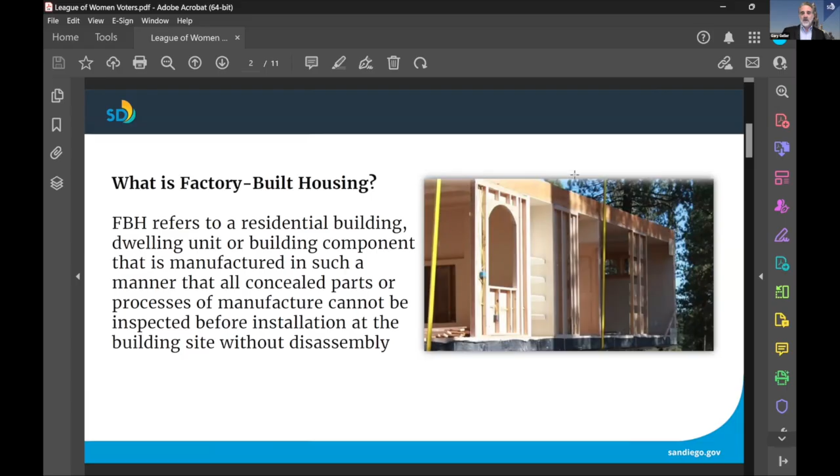What is factory-built housing? Factory-built housing is a residential building, a dwelling unit, or a building component that is manufactured off-site, such that the parts or the processes during the manufacture are not inspected at the site when they're constructed, but off-site prior to delivery to the site. What is not factory-built housing? A common misconception is that mobile or manufactured homes and commercial modular structures are factory-built housing. These are not considered factory-built housing. These have different requirements under state and federal law.

What role does the Development Services Department play in the factory-built housing environment? We coordinate with the state on projects that are submitted at the local level to the City of San Diego to review the plans. There are certain things that we can review and we cannot review. Those things that are done at the plant in terms of factory-built manufactured housing, there are certain components that we would not review nor inspect once it's on site.

So our scope is limited in reviewing plans to site-specific requirements such as the zoning. How many units can be built on this site? Are they utilizing affordable housing density bonus or complete communities or other types of housing programs at the local level? We can look at geology for the soils conditions of the site, fire, accessibility, and local amendments to the building code that are not adopted at the state level.

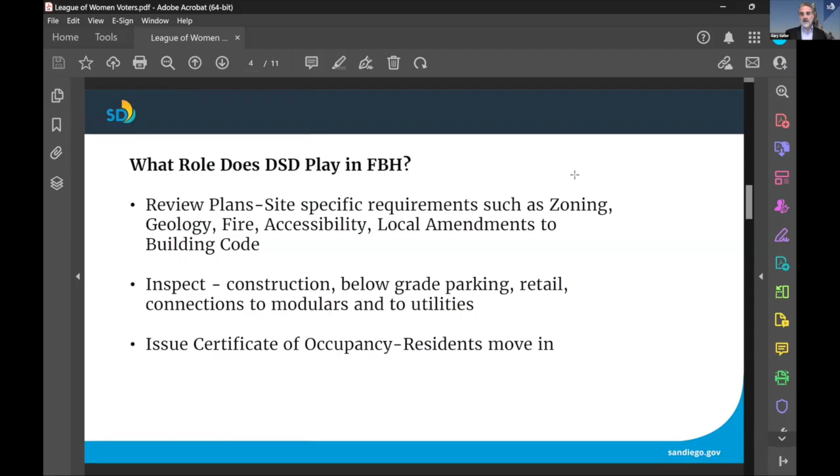We also inspect the construction, those components that are not factory built, below grade parking, any retail or commercial that is part of that development. We have seen a lot of mixed use factory-built housing that incorporates perhaps a coffee shop or a restaurant or a community room with the factory-built housing. We also inspect those connections to utilities on the site. And finally, our building inspectors issue the certificate of occupancy, and that's the point in which residents can actually move in and live in the factory-built housing.

What we found at the local level is that we've had successful implementation because we've worked with industry groups. Some of the gentlemen are here with me today, and others, in identifying what are those rules at the state level, what are those rules at the local level, and how we can better coordinate and streamline the review process. The idea of factory-built housing is it's cheaper to build and it's faster to deploy. So if we can remove time out of the equation, these units can get to market faster.

We had two successful rounds of a stakeholder group where we discussed ideas on our plan check comments. When a structural reviewer identifies an issue, how does the architect respond to that? We look at when it's under construction, what if there needs to be a change during construction? What if there's damage to that unit that's brought to the site? How do we coordinate with engineering and right of way, things that are done outside of the property line, connections to those utilities, that sort of thing, to streamline and fast track the approval and construction of these.

And then we discussed the affordable housing programs that the City of San Diego has and how this factory-built housing model can fit into those just like any other type of housing. And then finally, we discussed inspections because that is a key component of this in terms of our inspectors to understand what they should be looking at on the site to final these projects.

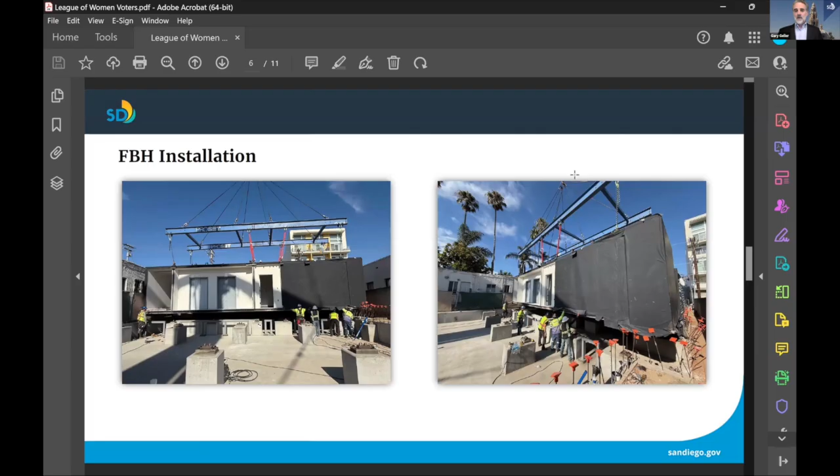These are some pictures of some factory-built housing installations around the City of San Diego. As you can see, they're craned onto the site. And what we noticed is these go fast, they move fast. So impacts to surrounding neighborhoods and communities are often less than typical construction because these can be done in a couple months or perhaps a weekend, depending on the size and number of units on a site.

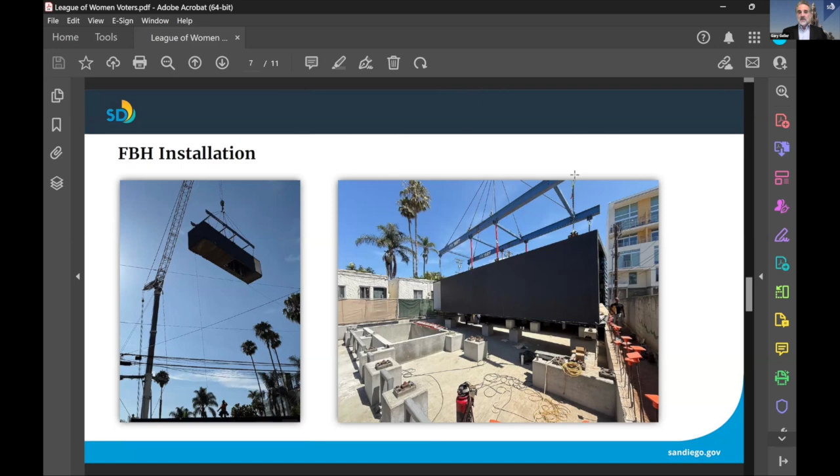So understanding that, we had to learn about, well, traffic control permits are also required because if you're putting a crane on a site, you might have to have no parking signs, you might have to have one-way traffic. There could be potentially impacts during the craning in of these structures onto the site. So that's another issue that we addressed with industry to see how we could better streamline that traffic control permit, because they have a timeline of we're bringing the crane on, we're moving the houses on, so we have to sync up our traffic control permits with their construction schedule.

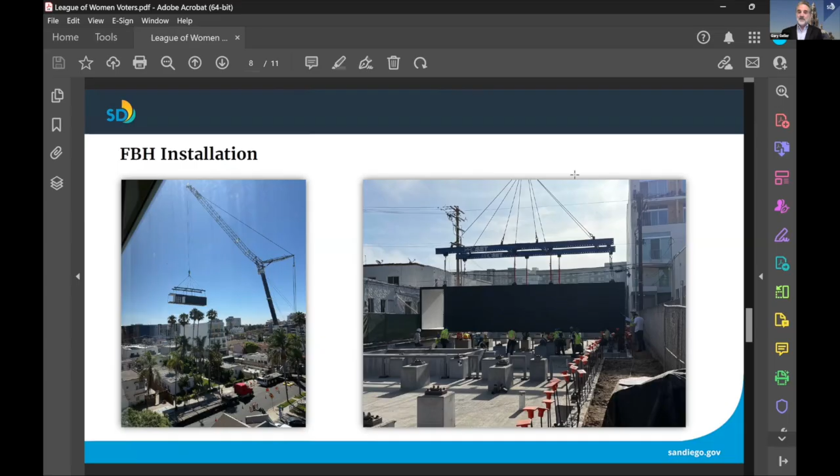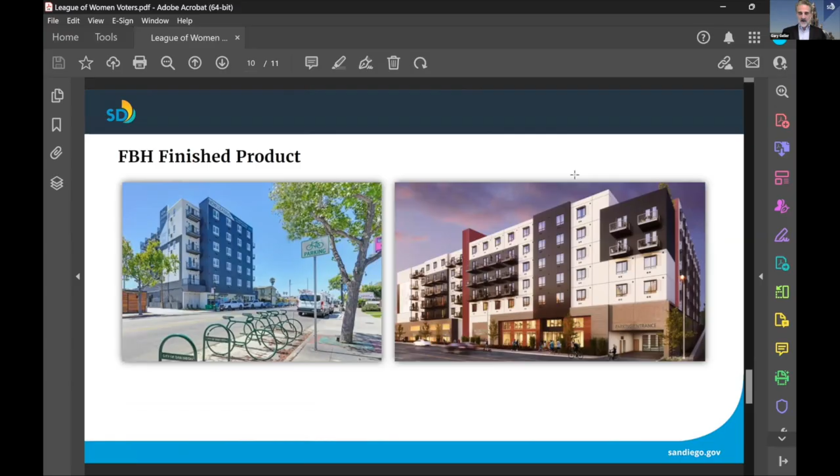Here's some other units that have been installed. And these are the finished products. And the gentlemen on the panel will also talk about some of the specific projects they've had in the City of San Diego. What's great about this is it's throughout the City of San Diego. As you can see here, there's over a dozen projects within San Diego, and these are all on infill sites. So some of them are smaller sites that can handle maybe 40 units, and they're taking advantage of the affordable housing and complete communities programs that I identified. And it's been a successful implementation so far, and I'll pass it over to Matt to talk about some of his projects.

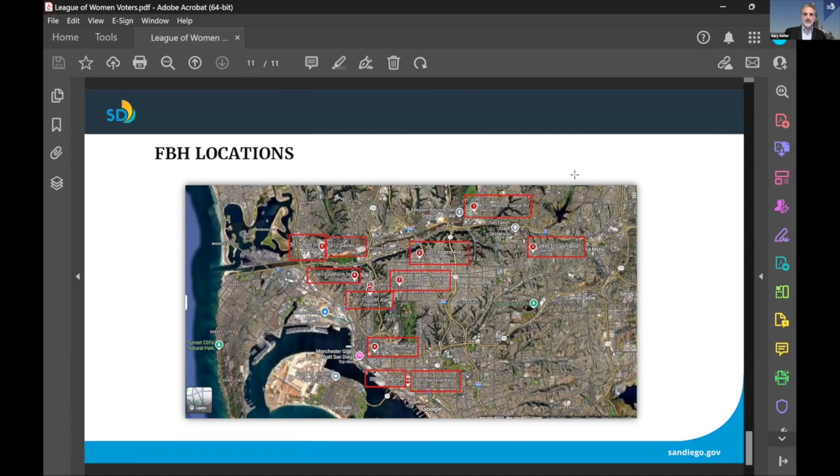Okay, let me share here. Let me get the slideshow going.

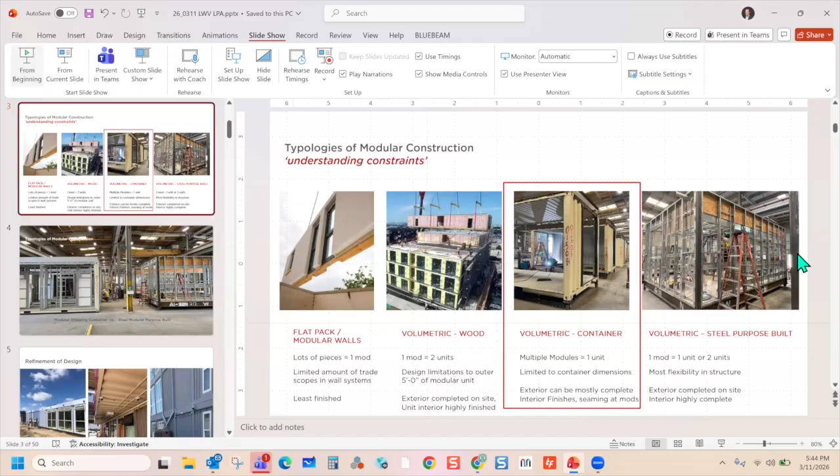Excuse me, Matt, can you share your slides again? They're not showing. Oh, okay. Let me try this again. Now we're seeing your desktop. Now we've got it, this is your title slide. Thanks, guys. Sorry for the interruption. No, I appreciate it. I only have one screen, so I have to put it all on one screen. Let me get this off to the side as far as possible. How about that? Okay.

So basically, these are the four typologies that I was talking about: flat pack modular, volumetric wood, volumetric container, and what we're now starting to call volumetric steel purpose built. One of the reasons the industry is going towards volumetric steel purpose built or volumetric wood, as opposed to volumetric container, is because with the containers, while there's this really great idea that you're reusing recycled material that's sitting out in the desert rusting away and putting it to good use, you end up taking them apart and having to put them back together. So the industry is moving a little bit further away from that.

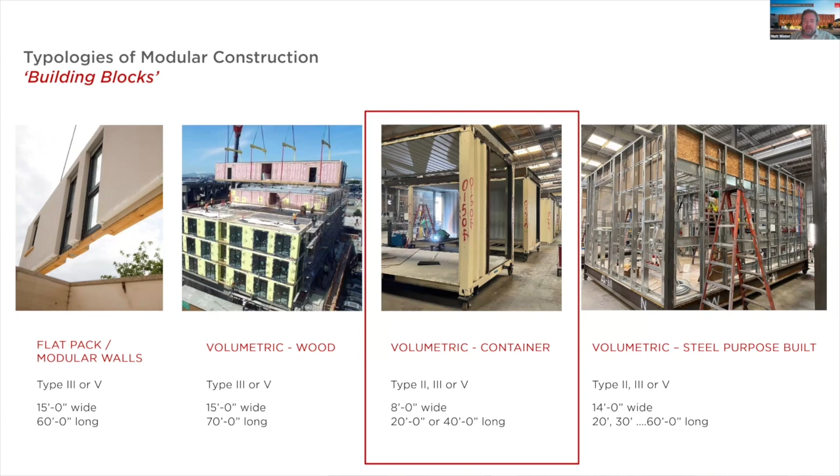But once again, the volumetric modular on the right, you can purpose build it, meaning you're not constrained by the 8 by 20 module of the shipping containers. When we first got into these projects, we looked at some existing projects and noted that they were very, very messy. People weren't very thoughtful about how they put them together, and they slapped on a lot of extra conduit and lighting and all kinds of stuff. So we worked very, very hard, and you'll see later, to clean that up as best as possible.

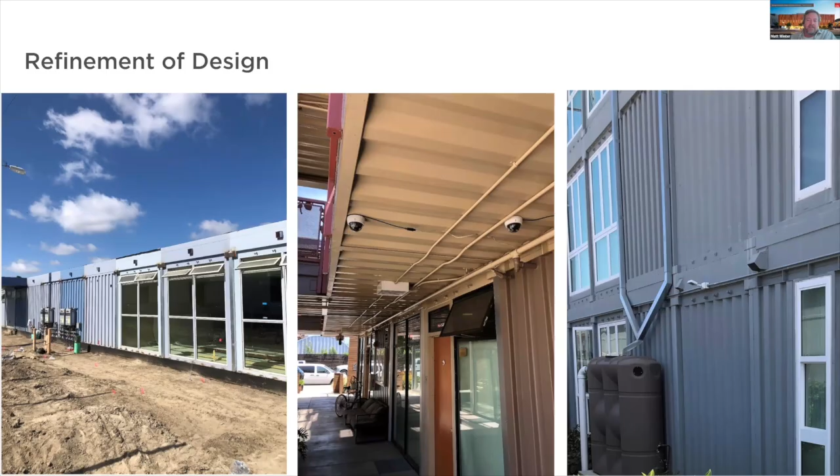And I think it's important, as this industry is maturing, that's really thought through and carefully organized. A couple interesting things about modular construction.

One of the things you'll hear about why this is important is, if you're looking at the schedule here, on a lot of projects you can do the site work while the modular project is being constructed off-site. You can see this long green line of 24 months of construction, and you're actually sort of cutting it in half and then stacking it, making it concurrent. So in this case, on the project we're going to share here in a minute, we were able to manufacture all that stuff while we were building the podium for the project.

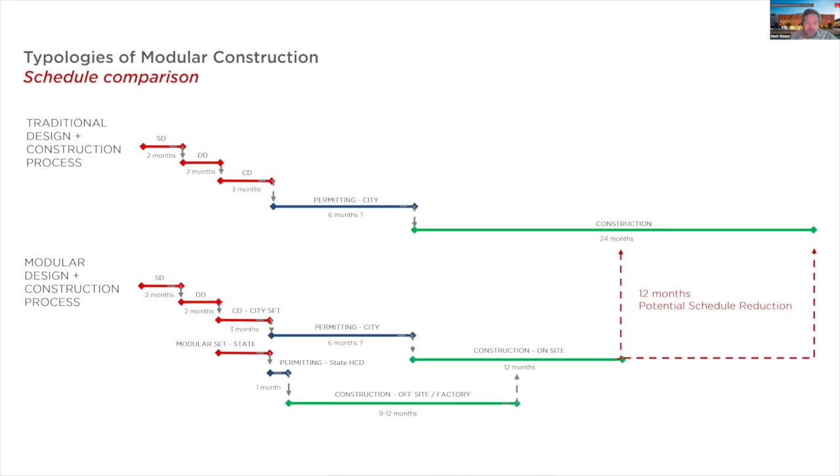Another important aspect for modular construction is that a normal bank draw for any kind of construction project is typically like 10%, 10%, 10%, 10% as you work your way through the project and you're buying more materials and getting more completed. So banks aren't used to the modular offsite factory cost where you have to buy all the materials in one shot. And so you're asking for more money earlier. So it's a little bit of a different setup.

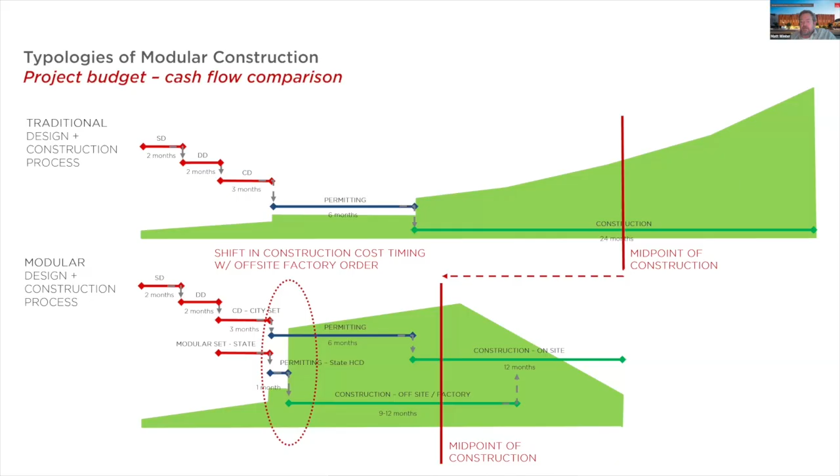However, some banks are becoming more comfortable with it, and some people are more vertically integrated and able to handle that way of working. But it is a different sort of financial outlay. Other things that are important to understand while you're thinking about modular construction projects is location, in relationship to the factory. Part of the conversation when you're looking at different modular manufacturers is transportation costs. Scale of the project is really important.

Being able to understand if the scale makes the most sense, understand the program. You can't have a lot of complexity in any of your projects. It's got to be relatively straightforward and simple. Stack. That's why residential is a really good use for modular. Hotels is another one. Whether or not prevailing wage is a part of your project is potentially a factor in whether it makes sense to go modular or not. And then understand the local construction market and its costs.

So the design process. This is the project we're sharing here, and it's with Family Health Centers of San Diego. They're one of the largest nonprofit healthcare providers in the country, and the largest in San Diego County. They have maybe about 50 health clinics in San Diego County. However, they've recently become very aware of how important housing is to health, and how they're just intimately connected.

And so they had a site where they had an opportunity, on El Cajon Boulevard, where they could put housing on one of their clinic sites. And so they decided to go all in on this project that I'm about to share, which was housing on top of their clinic, on top of parking, and also go modular. So they kind of jumped off a double diamond slope on their first housing project, but I think it was really successful.

To talk a little bit about the design on this project, the community plan actually calls for a bit of a street wall on El Cajon Boulevard, but this particular site doesn't have a height limit. They just updated their community plan for higher density in this region. But we were still trying, as best we could, to be sensitive to the multifamily and single family on the north. And so we broke up the building on the north side to really break up that massing. So when you're looking up at it from the backside, it's smaller chunks, while the community plan asked for more of a solid street wall on one side. We also did that to increase airflow, create more public realm spaces and create better lighting throughout the project.

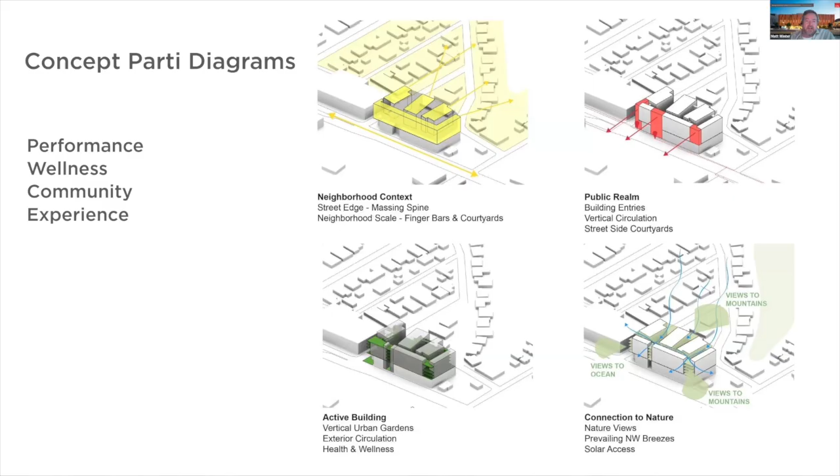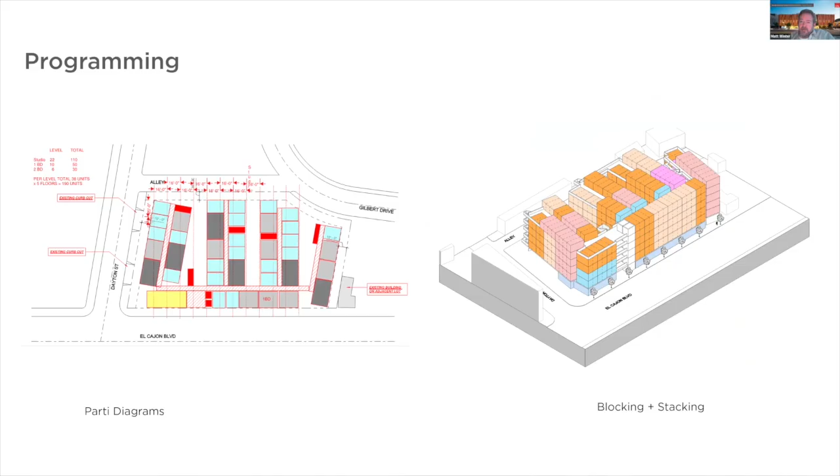From a programming standpoint, we had all these building blocks, basically. And one thing about modular is it does give you some very strong constraints to organize your building. In fact, it was really helpful in this process, and I'll get to why in a little bit. So at first we had to understand the massing, and then we had to flow in the actual container pieces.

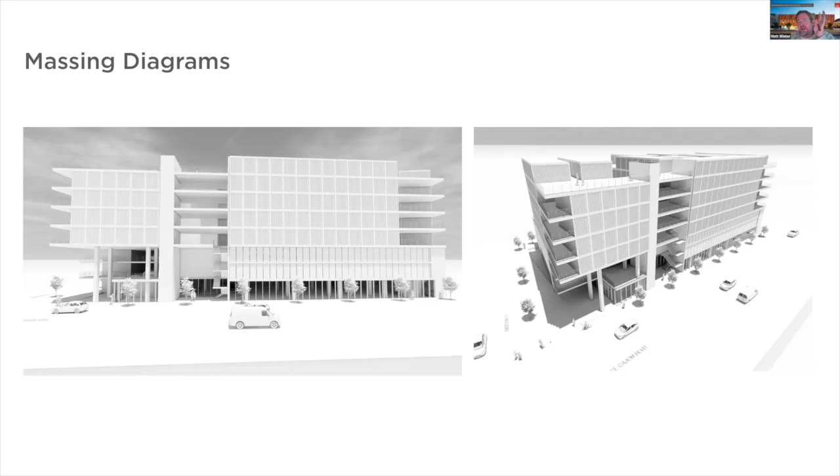As you can kind of see, those are containers stacking on top of basically a ground level clinic and 2 levels of parking above it. But you can kind of see how even with the street wall requirements, we tried to break up the facade as best we could so we can allow more airflow to go into the building.

Here it is with now window patterning. Housing is more about patterning and texture than most buildings, just because of the repetition of the program. And here's the final rendering of it. Currently, so here's the project itself being laid out.

And as Gary said, it goes really fast. We are able to do a floor a week. We drop the entire floor in a day. And then we'd spend about a week sort of connecting things up and getting it ready for the next drop the next week. So when the time came, it was just in time delivery right out of the factory, dropping 1 floor per week. There's still work afterwards, but the actual putting together the building went really, really quick.

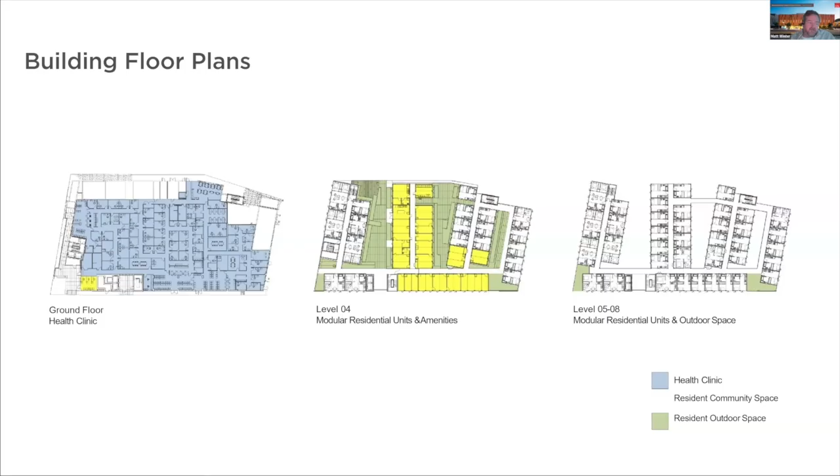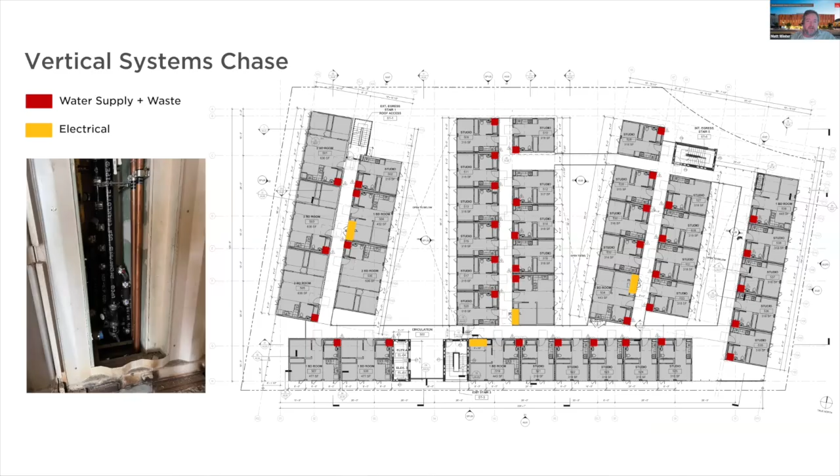Vertical systems are very important to understand and organize throughout a site. It's critical that you understand how that flows, and in this case, flows into the garage and flows up to the roof. So understanding the particular secret sauce of any particular modular manufacturer is kind of critical in organizing your building. Same thing with any horizontal systems.

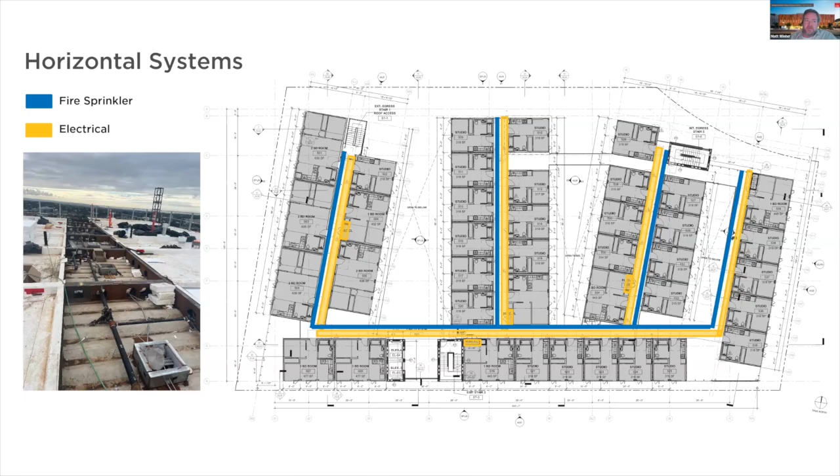This one is a little atypical of most modular projects because most of them go straight up to the roof with all their mechanical and electrical. In this case, we were grouping them around a shared system specifically because we're trying to get to net zero and we're using a very highly efficient energy system with grouped up mechanical systems. So it's a little bit different. So we had to really track how that chased through the hallways.

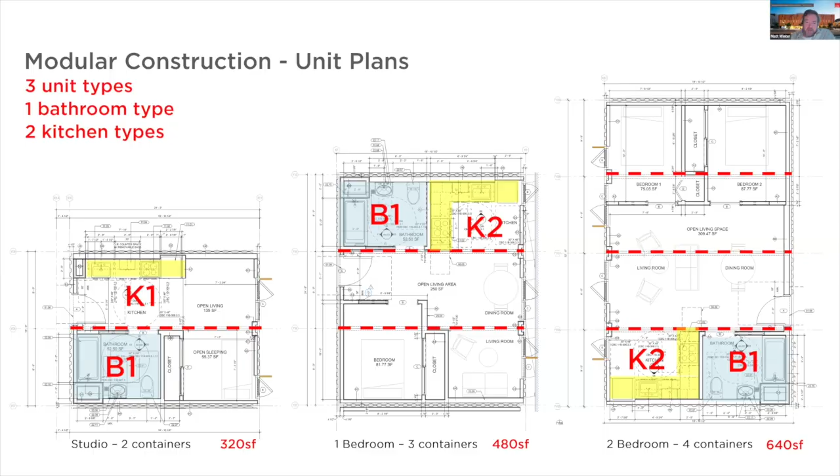Here are the modular construction unit plans. You can see very, very simple. For the entire project of 172 units, we had one bathroom type and only two kitchen types between our studio, our one bedroom, and our two bedroom units. And you can very clearly see it's 2 containers, 3 containers, 4 containers. So real small units here, you can kind of see them seam up together.

Now, it was really important for us to think about high performance design. It was one of the programmatic requirements from the ownership. So we needed to make sure that all the water, electrical, and mechanical systems were integrated in the building. Right now, we're tracking at 86.6 energy reduction from baseline, so we're really close to net zero on this one, which is really hard to do on a tall building. So we're really proud of that.

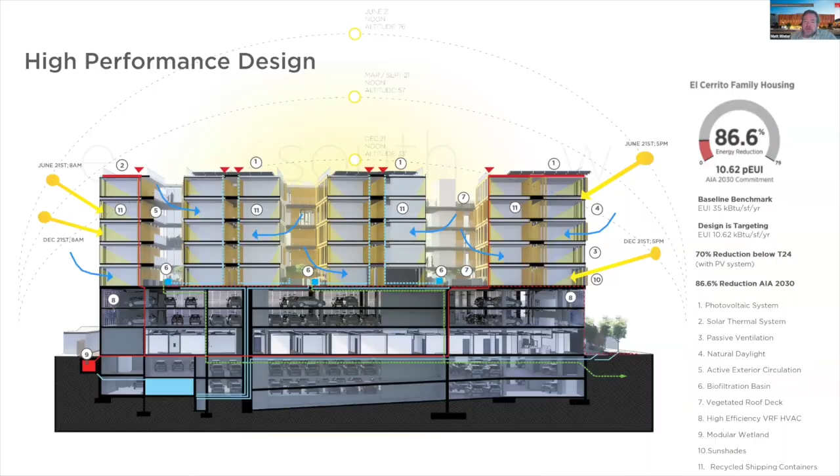Now, when you have these smaller units, it's really important to do the best you can with light and windows. This is the same amount of glass, percentage wise, as a typical residential multifamily project, but we made it a little skinnier and a little taller and grouped it up in certain areas a little more. As you can kind of see, it lets the light flow across the ceiling and the floor a lot better as opposed to a punch window in a room. So that was really important.

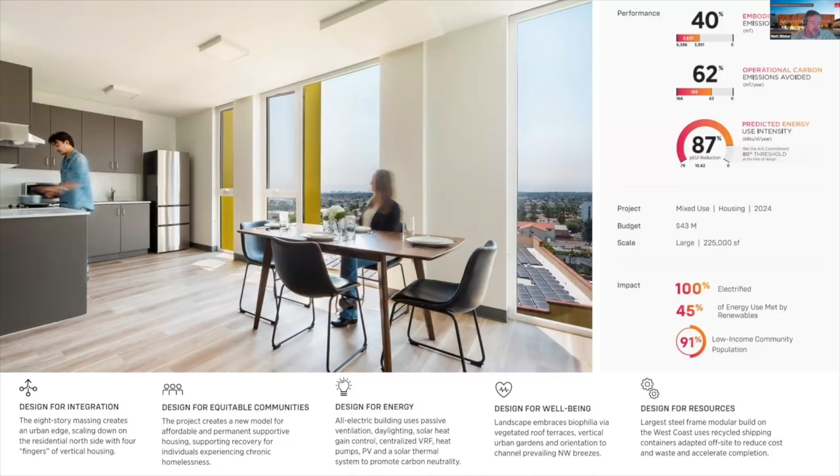Modular permitting process, just a couple more slides with this, and then I'll just zip through the pictures. As Gary was alluding to earlier, there's a state review of the modular stuff, and then a local review of all the stuff that's local. In this case, we had a huge podium, vertical stairs, things like that. There are modular projects that have modular stairs and modular elevators. In this case, it wasn't part of our program.

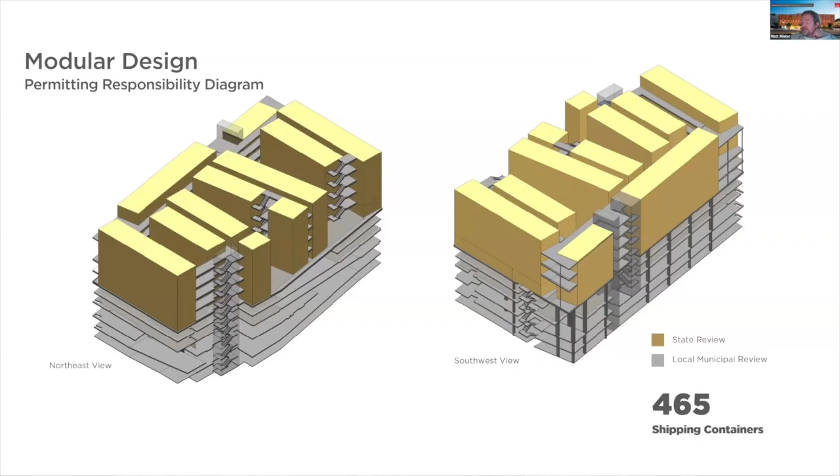This is 465 shipping containers. And as you can kind of see, here's this little elevation. You know, the city is still the grantor of occupancy.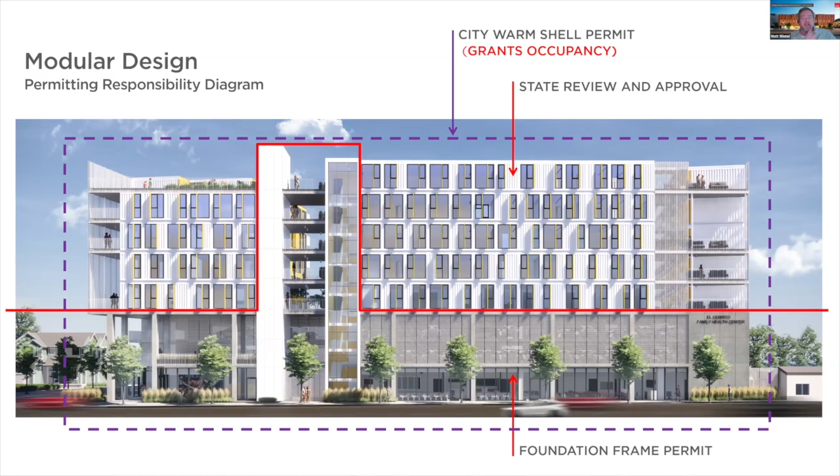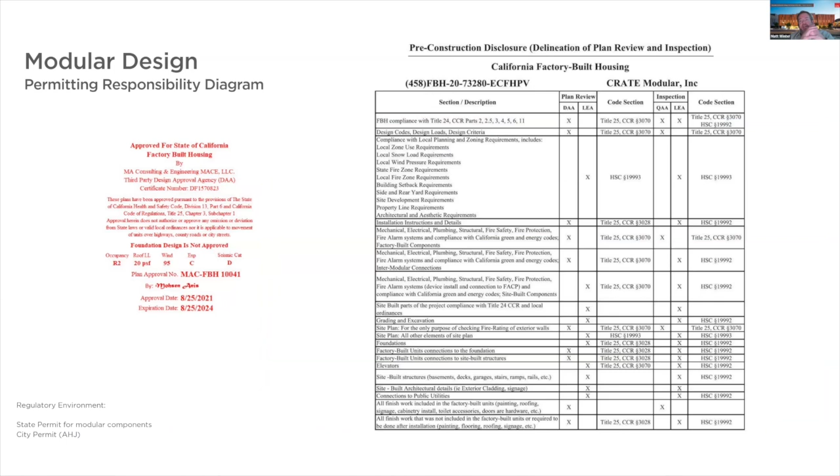They're still the inspector of all things local. So we had to have our local guys. In our plans, we had to very clearly explain who did what. So the state did review all multifamily projects, and they have inspectors at the factory. So we put this in our plans. Everything in the yellow column is the state reviewers and state inspectors. The column to the right of the yellow column is the state or the local reviewers and the local inspectors.

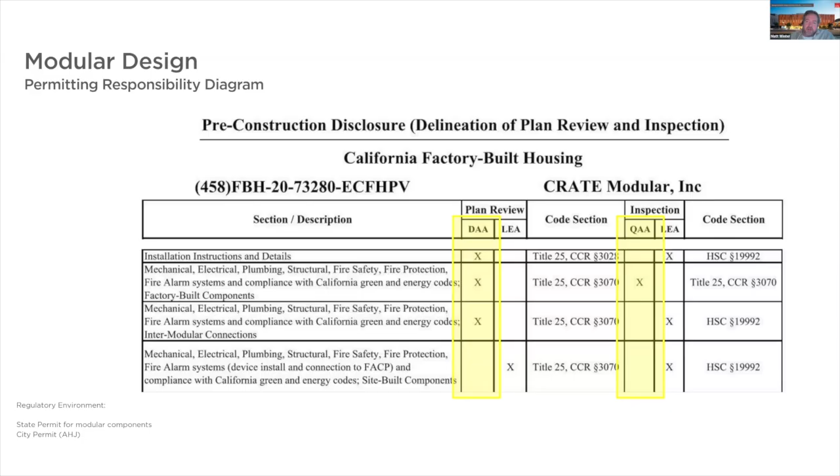So, for example, all the factory built components for mechanical, electrical, and plumbing are reviewed, approved, and inspected by the state agencies. It gets different when you go down to the next stuff where you're interconnecting the modules together. That's reviewed and approved by the state agency, yet inspected by the local jurisdiction. And on the last line there, you can see anything that's site built is local review, local jurisdiction. So it's really important that we had a lot of these conversations before we got started with our plans, and we have this matrix in our plans.

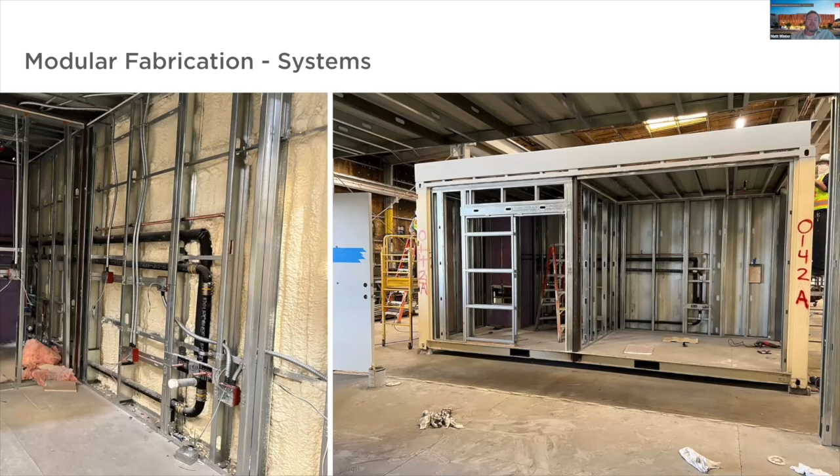Fabrication, I'm going to zip through these really quickly, but you can see we deconstructed the project, the containers, you're putting it back in there. One really nice thing is you can do mock-ups with this. We did an accessibility mock-up to make sure, before we built 150 bathrooms, that they were fully accessible and reviewed by our CASp reviewer, and we made adjustments with countertops and things like that to make sure that went right. Here they are in the factory.

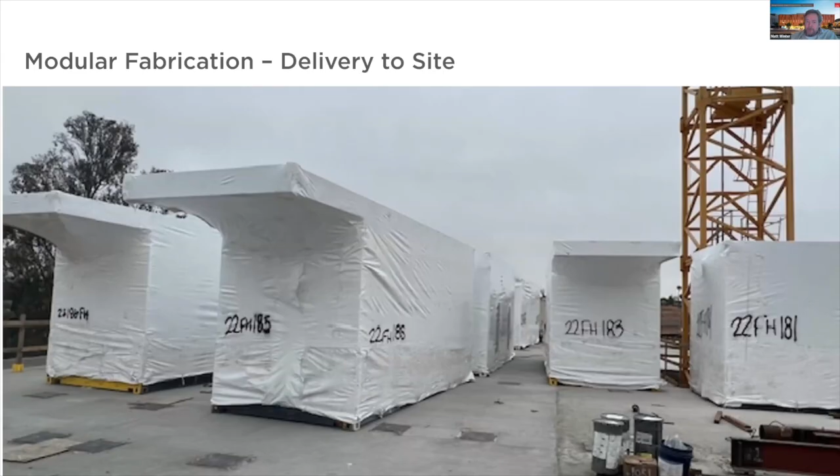Here they are wrapped up, ready to go. Here they are being placed. We're still placing one more floor on phase one, which is in the background on the other side of the crane. And then here it is being dropped. This is the phase one portion. We're actually permitting phase two on the other half of the podium right now. And these are some pictures of the units.

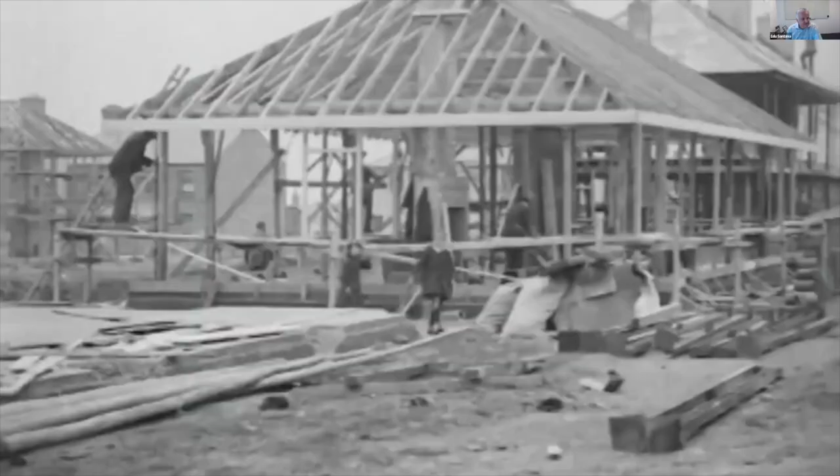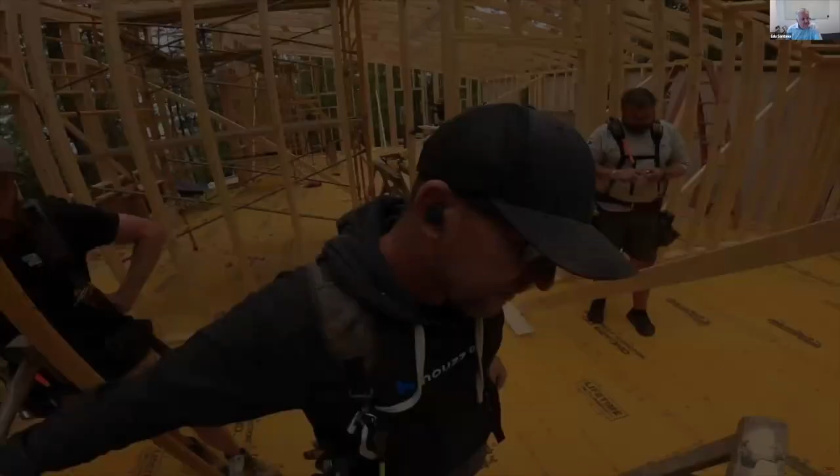When Ford first conceived the Model T, it took 13 hours to assemble. Within 5 years, he was turning out a vehicle every 90 seconds. Of course, the real invention wasn't the car, it was the assembly line that built it. Pretty soon, other businesses had borrowed the same techniques. Seamstresses became button sewers. Furniture makers became knob turners. It was the beginning and the end of imagination, all at the same time. Housing construction in 1915 applied the modern advancements of its time. The world kept progressing, except for one industry. The construction process is stuck in 1915. It is time to catch up.

Can you see my screen?

Okay, good. So a bit of a different kind of introduction, but as I go through the presentation, you'll understand why I opened with this and why we talk about not just our industry, but how it compares to other industries. Because for us, a huge part of our focus is to learn from other industries, like the automotive industry, and I'll say more about that. But essentially, we deconstructed why housing has become so unaffordable. Why do we have shortages in housing production that are not meeting the needs of our population?

And so then, as we started to understand that, we discovered that the issue largely is about cost. So for us, modular manufacturing and modular construction techniques are a means to an end. About a third of the affordable housing that's needed in Southern California gets built, and that we think is not acceptable, and it's leading to a lot of the issues that our communities are facing.

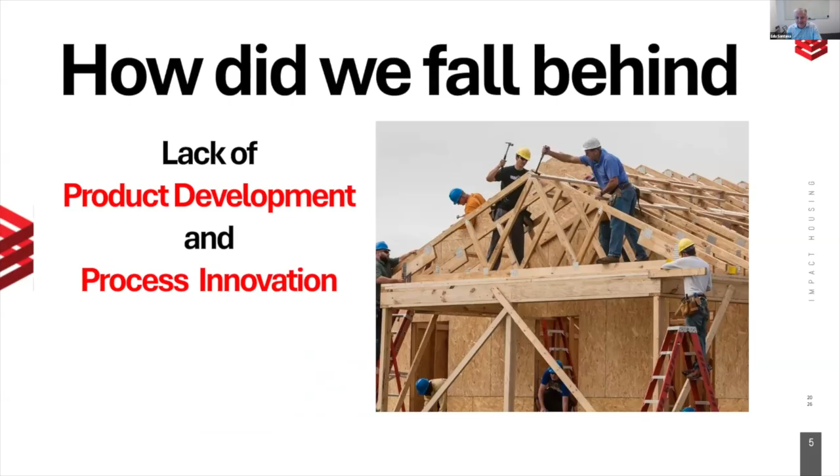So where did we go wrong? How did we fall behind? And we think that it's really about the product and process. And so I'll talk about that more in a second here. But going back again to the reference in the video, another part of that is the cost that Ford had to build a new car in 1913 was about $850, and then they actually were able to see costs go down over time as their processes improved.

We've already seen a reduction in our cost and are projecting even further cost reduction as we're able to buy higher volumes of materials, and so having per unit costs for the materials come down. We're more efficient in how we're assembling the units using advanced manufacturing methods to do that. So there are a lot of different things that we're doing to bring that to bear, and that's leading to lower costs, which is not something that's typically seen in our industry. Typically, people are assuming that costs are going to go up over time.

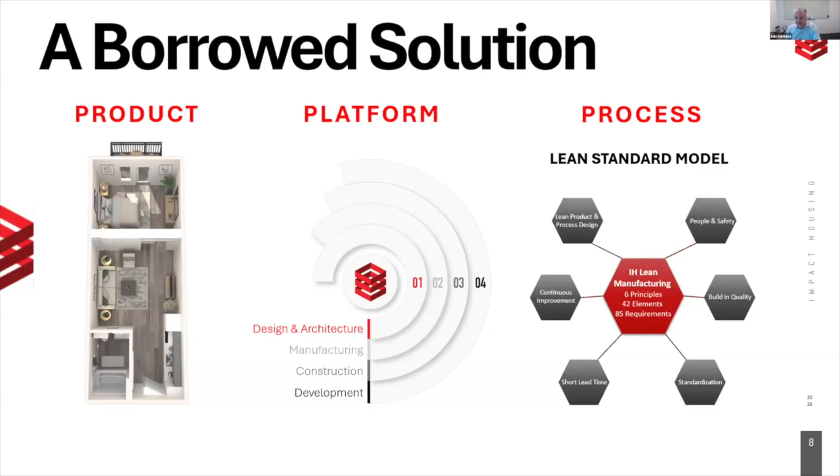And then we're also not only the design builder, but we're also a developer, so we can also handle all of the development aspects of a project and pretty much do soup to nuts, or offer the design build services to third-party developers and deliver their projects for them. And then also really establishing best practices in manufacturing, which I'll talk about here in a second.

So again, on the platform, this is just atypical in our industry. There is such a thing as design build, where you have contractors with in-house architects, but then to add the manufacturing piece as well. Again, it's all of these disciplines that are in-house. The reason that matters is because they work together on a daily basis to solve problems that then get applied as a standard process and product that we build for future projects.

And so when you have all of the key disciplines in-house, the level of collaboration, problem solving, it's not really about pointing fingers ever. It's really about discovering issues, solving them, and applying that solution to future projects. And then also, as the development entity, we can take responsibility for creating our own demand, for bringing in capital to finance the projects, and really having a single source for all of it. And then, of course, offering the design build capabilities to third parties to build for them.

One of the most advanced ideas regarding manufacturing is this idea of lean manufacturing. It's actually based on the Toyota production system that really had Toyota become the preeminent car manufacturer and surpass all of its competitors. The sentiment when they first came out with this was like, wow, Toyota builds the highest quality vehicles. Since then, almost every car manufacturer has emulated their process.

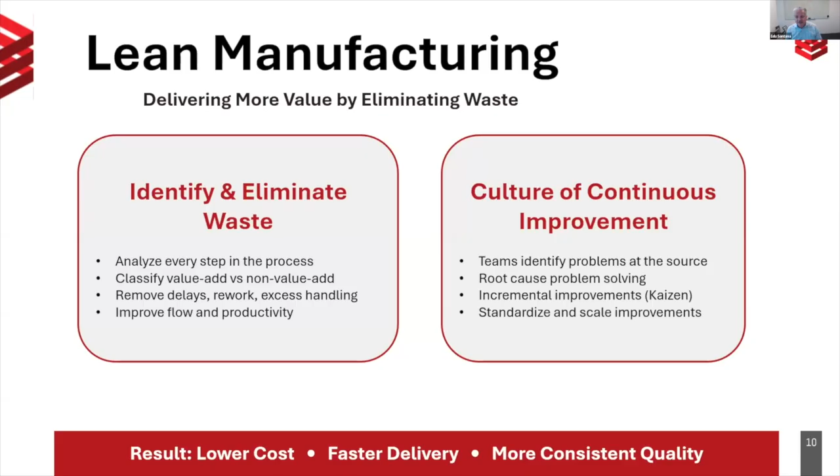And then also a culture of continuous improvement, as I mentioned, finding challenges, finding issues, finding problems, solving them, and then having those incremental improvements be applied over time. Matt showed a slide similar to this, just pointing to how our process leads to faster deliveries. I don't have to spend a lot of time here.

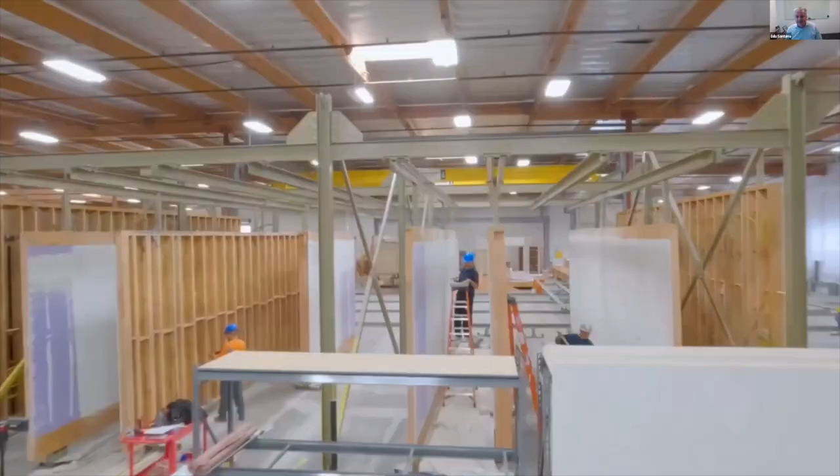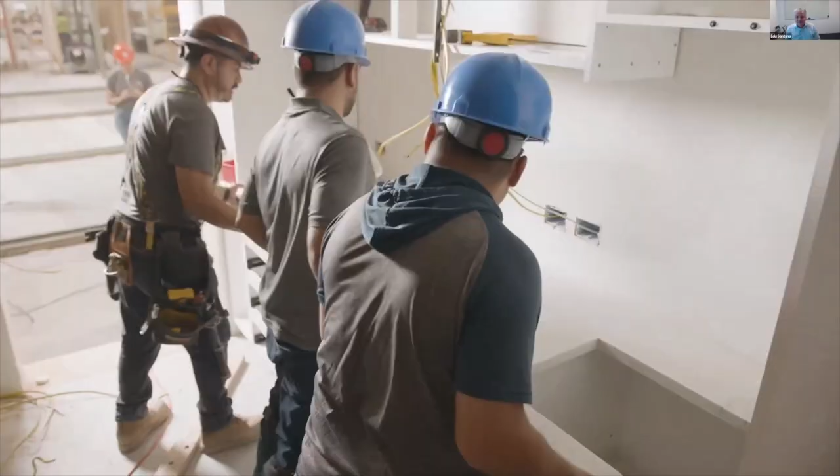This is a look inside of our manufacturing facility. It's hard to really go through in detail. There's some automation. You saw our automated saw there. There are a lot of efficiencies in how the units are being assembled and manufactured. Everything that you see happening here in the unit, there are work instructions for it. Those work instructions are constantly being updated and improved over time to lead to better outcomes in terms of utilization of the labor, in terms of labor hours, which ultimately leads to a lower cost of delivering the housing, which of course could then open up the opportunity for charging lower rents.

The other big idea that we pursue is we don't find a site and design and build units for it. We have units that are our products, that we have specific work instructions for every bit of scope that comes with manufacturing the units that you see here, and that's what we offer. When a developer comes to us and says, hey, we want you to design build a project for us, we show them our product line and say, okay, which of our units would you like us to use?

These are our urban infill units, so these are a lot of the units that you would see if you were to come to one of our projects in San Diego. We also have a suburban product line with larger units, for areas where that's appropriate. But we have a product line, and inside of it, these units are the same units in every project, and they get improved incrementally over time, with a focus on really efficient use of space.

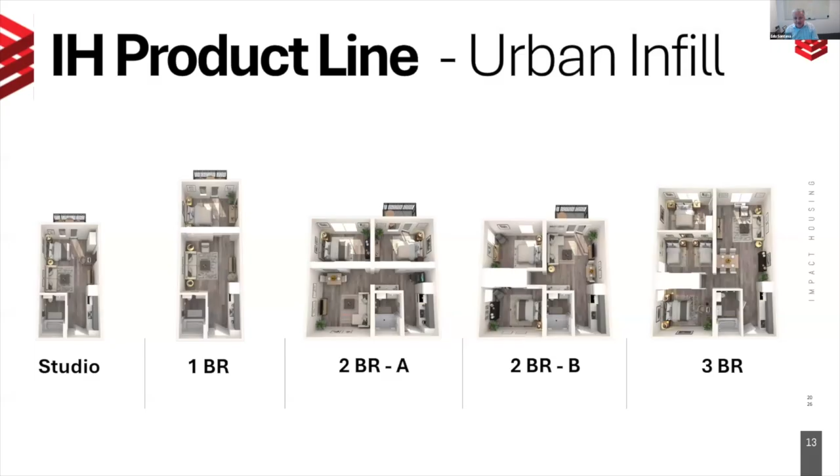Again, because we only have a select number of products that we make available, we spend a lot of time and energy properly designing those units and ensuring that they're the best units we can produce, given the constraints of the dimensions of the unit that are inherent to the modular manufacturing approach, where you need to be able to deliver the units on the backs of trucks. And so the dimensions, as you can see here, are set at 14 feet wide, so that we can transport them on our highways.

So also looking at some of the interiors, creative use of space, additional storage, etc. But really looking for high touch, high quality finishes, without breaking the budget. So in closing, really for us, modular is a means to an end. It allows us to deliver housing at the speed of need. And in San Diego, certainly there is a tremendous need for more affordable housing.

The city is continuing to grow and attract more employers. We need housing for those new employees. And also for the current residents of San Diego, a lot of whom are relegated to older housing that maybe doesn't have the modern features and finishes that we're able to provide them.

So I'll leave it there. I have a lot more visuals if anyone's interested, but I'm open to any questions.

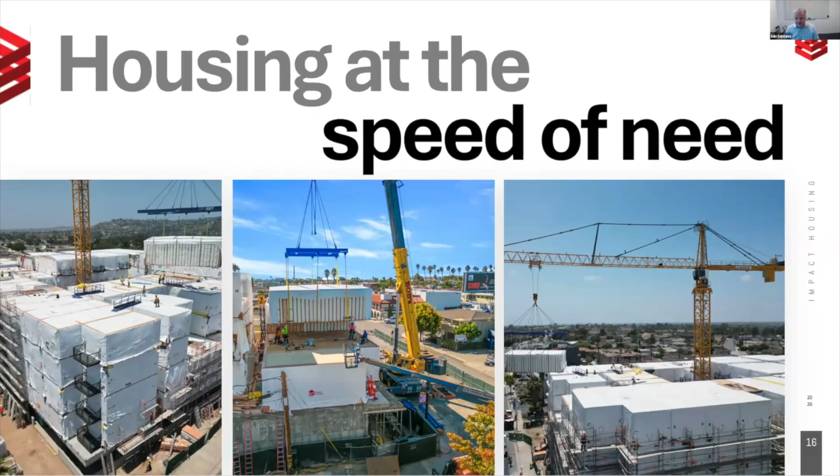Wow, that was terrific, Edu. I think I was at the Academy Awards there for a bit. So thank you so much.

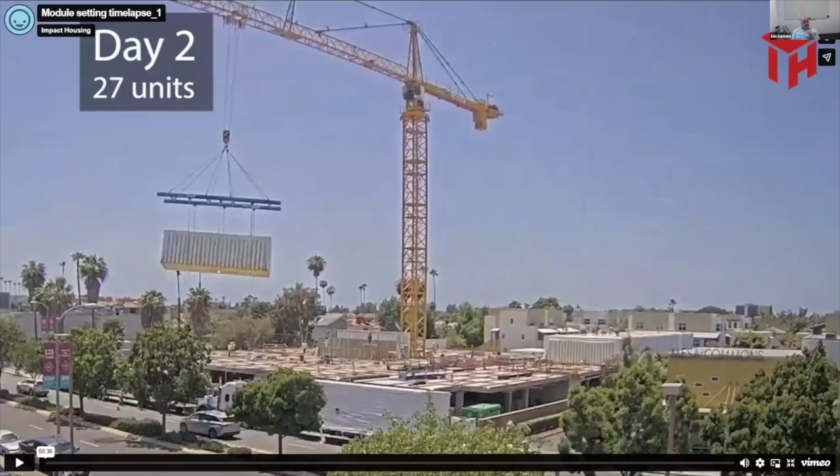So the next question is, I think, for both Matt and Edu. What do you think about the quality and long-term durability of factory-built housing? Well, I will say this. We get asked this question a lot, and I'll share a video again here just to illustrate it. What we're building are fully volumetric modules, and so you have material on every side. So between units, you have double the amount of wood material that really adds to the structural strength of the project, and that adds to the durability of the building.

Also, a lot of the structural requirements of the units are based on them being able to be shipped on the road, which is even more onerous than earthquake standards. And so, from our perspective, the durability is even greater than stick built housing. And I can second that. There's not a big difference. These projects still have the same amount of electrical wire, the same amount of copper pipe, the same amount of drywall. It's not that wildly different from a stick built building. It's all about process, though, about how to compact time. And a lot of modular manufacturers will say, "Our product is even better because we're building it in a controlled environment." And I think that's true in a lot of cases.

Okay. The next question: is it your sense that factory-built housing is becoming increasingly used across the country? So this is getting your wider scope here. And it is noteworthy, the questioner noted that factory-built housing is included in the proposed housing bill that's before Congress right now. Do you have any sense of what contributed to it being included in this bill? To the first question, we have about 2,000 units either built, under construction, or in review, which is a large number for housing units.